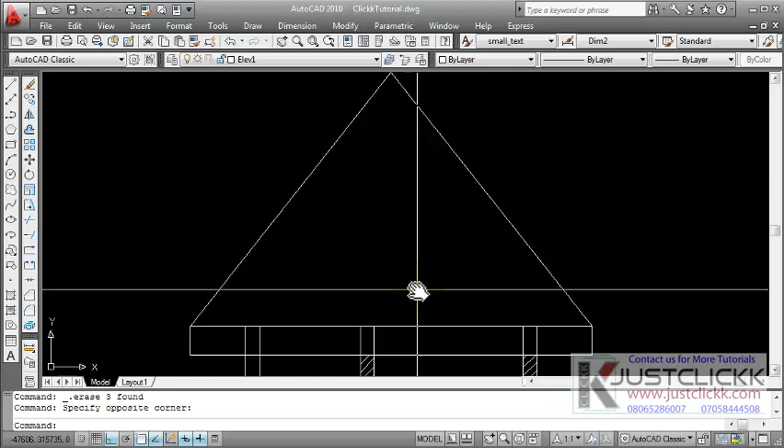So on the roof part of the cross section, we will start with the ceiling arrangement, and let's start by offsetting the thickness of the ceiling, something around 15 mm.

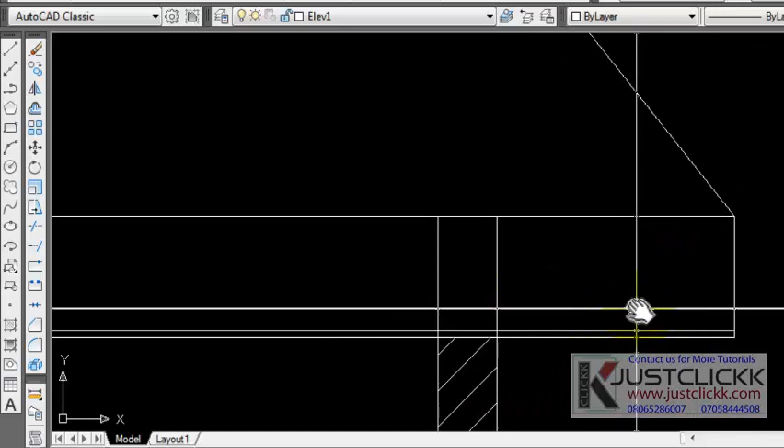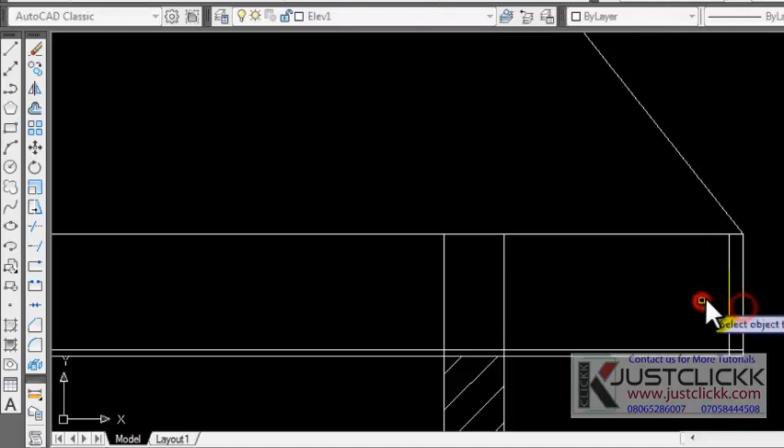Offset like 15 mm, like so, and we will now offset the thickness of the fascia board as well. Let's make that 50, or let's say 75. That's too big. I can't recall exactly the thickness of the fascia board, but let's give something that will look presentable. 30 is okay, or 30 or 35.

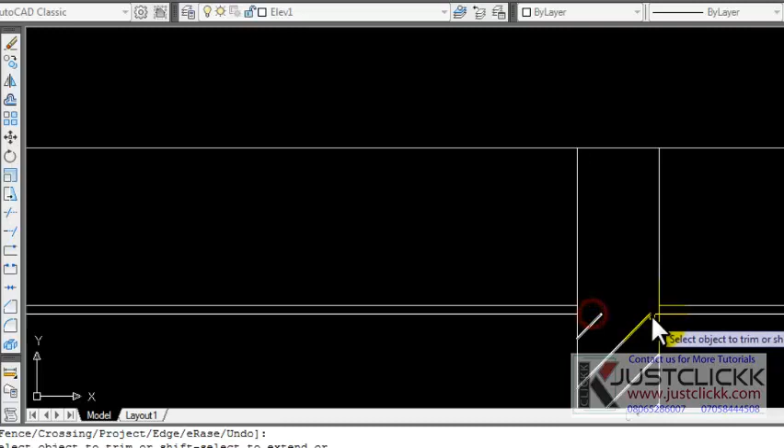At this level we can do some trim. We can trim this here like so, and we can also repeat a trim - sorry, I didn't activate the trim tool. We can repeat the trim right here because the ceiling is not supposed to run through the wall.

Okay, and mind you, I'm going to... that's how you start coming up with your ceiling.

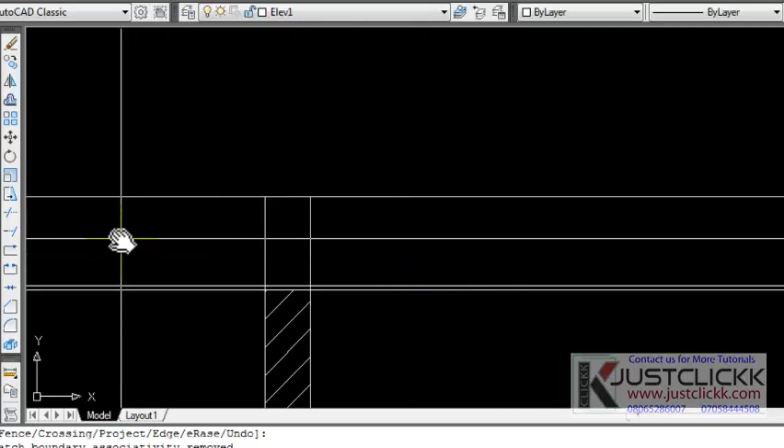Then let's create the noggins. We will check the noggin size, let me take a look at my sketch. The noggins are 50 by 50 mm.

All right, take your polyline and then create a 50 by 50 box. 50 by 50, come downward 50, and then close it up here. So you have your noggins.

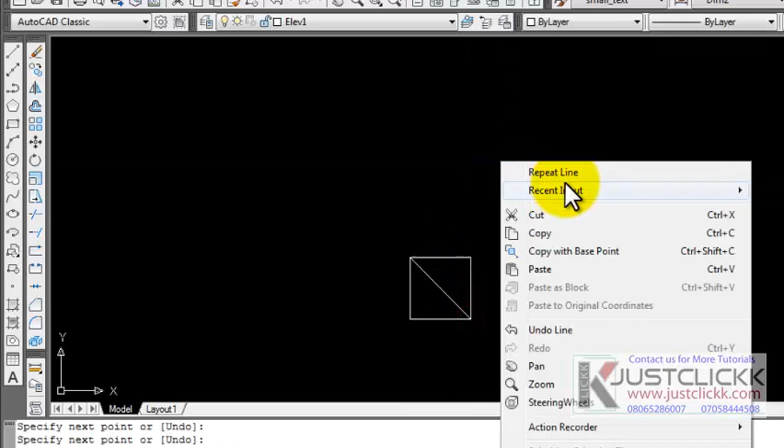So let's pick a line tool and create an impression like this. Repeat, and then we'll create from the center point here downward something that cuts across like so. So that's part of the noggins.

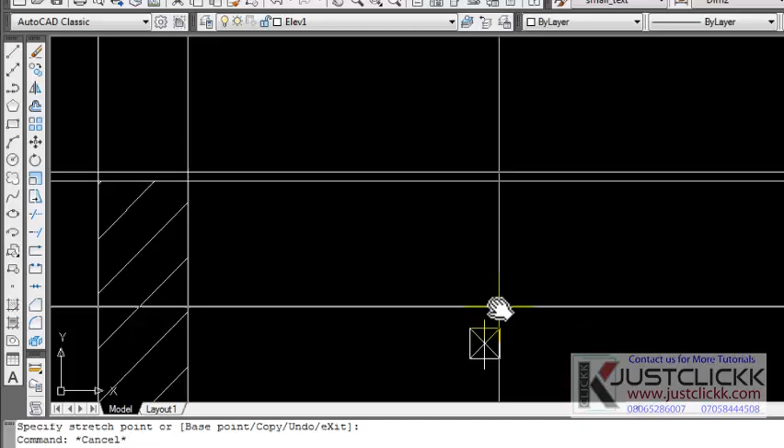We'll pick it and bring it right here. It's going to lap at the corner here.

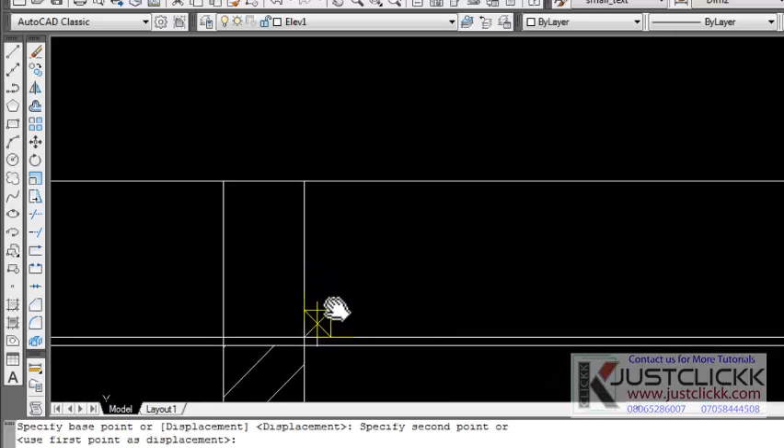It's going to lap at the corner there, and we will now use the extend tool to extend - no, okay, because it's a polyline, we can't extend. As you can see, we can't extend the polyline.

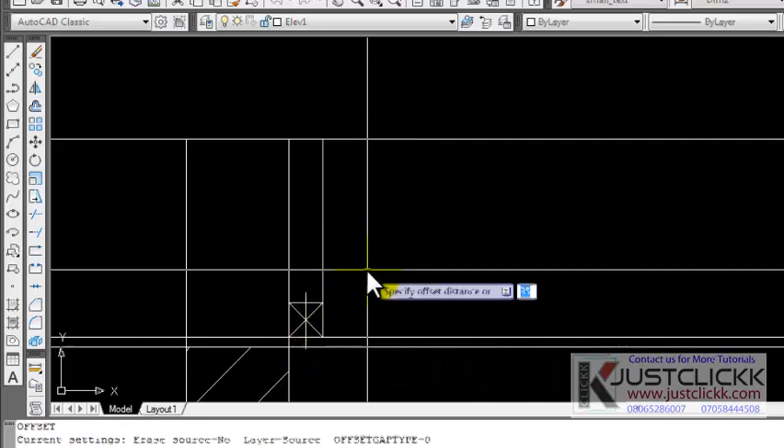So let's pick a line tool and create the vertical noggin, the noggin that is actually suspending the ceiling. Let's offset this, it's also 50 this way, and then use our extend tool to extend it down, and also use the line tool to connect it to this portion.

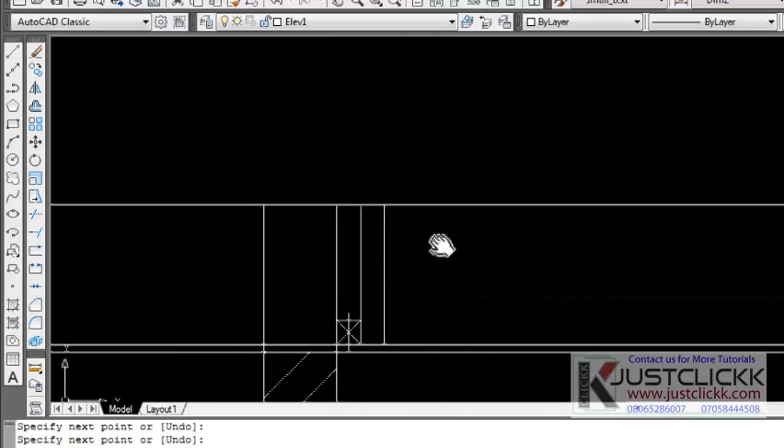So you see that a noggin runs from the tie beam straight down to the ceiling. So it's actually the noggin that is suspending the ceiling.

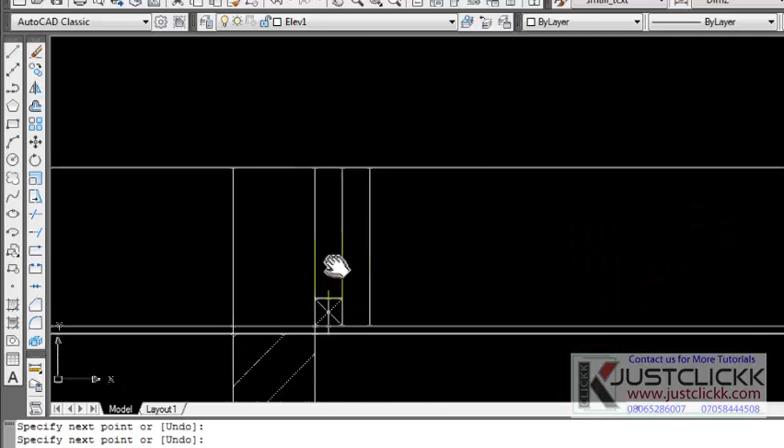Alright, so this is what we are going to duplicate in order to fill up these spaces for the ceiling. So now let's mirror this. I have to create a mirror here, specifying somewhere around here as my base point.

Delete, erase source object - no. I have the mirror here, then I will select this entire mirror and then move it at this edge to drop here.

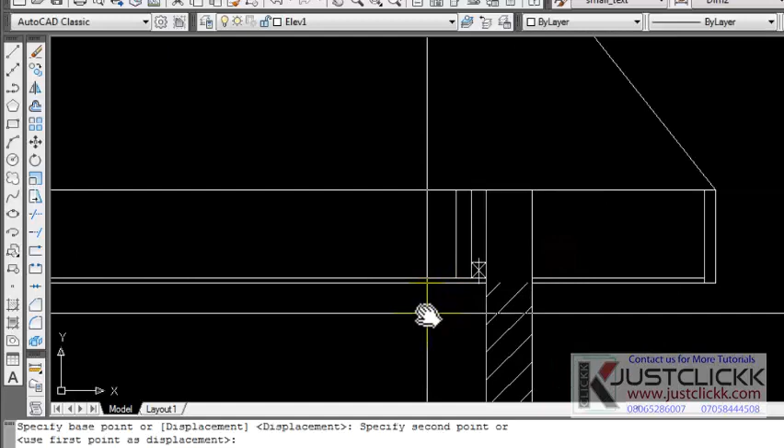So I also have to make another mirror to the - how do they call it - eaves, to the eaves here.

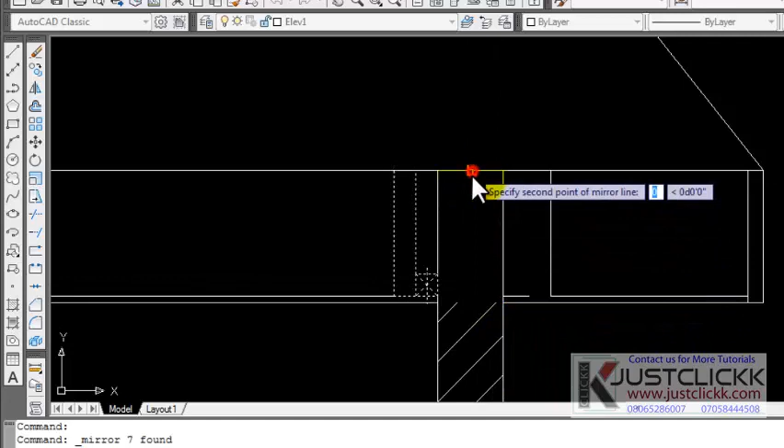Select this, I'll mirror it. I want my base point somewhere around here, don't erase the source object. So I'll reposition this properly by holding it at the corner here and allowing it to lap to the wall. Okay, I've just achieved that.

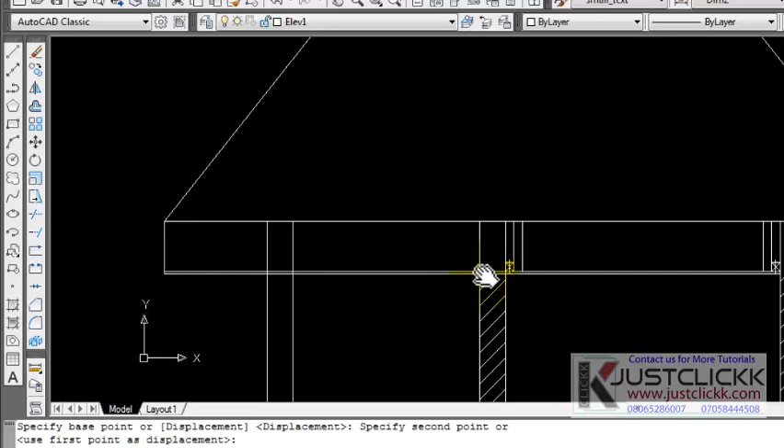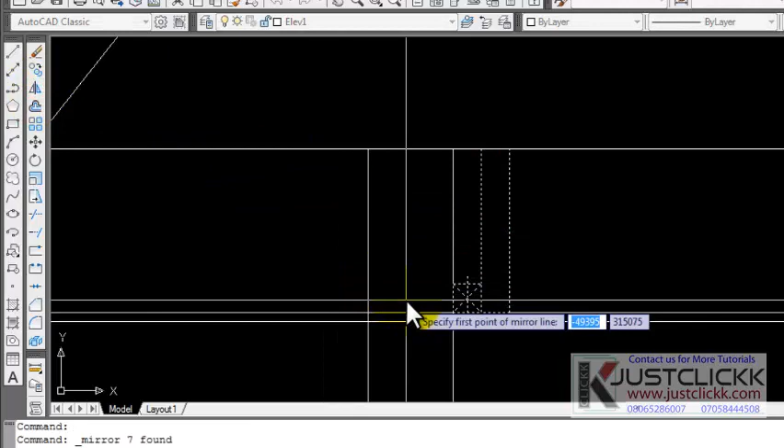I will also do the same here. Pick this, copy it this time around, move it from this edge straight to that place, and I'll repeat the mirror again. Mirror, reposition it to lap to the wall.

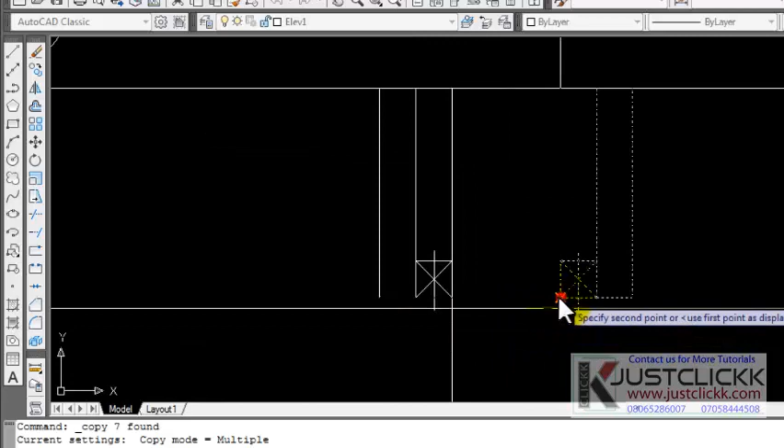I'll copy this, drop it somewhere around here, because I've not offsetted the thickness for the fascia board, which is 35.

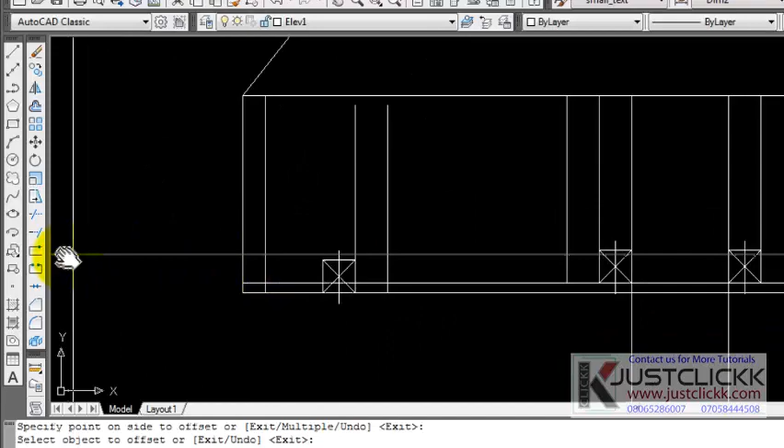Well, I think I would have just concentrated on one side, so when I am done I will then mirror to the other side. I think that's what I would simply do. So let me concentrate on one side, and when I'm done, I'll mirror to the other side.

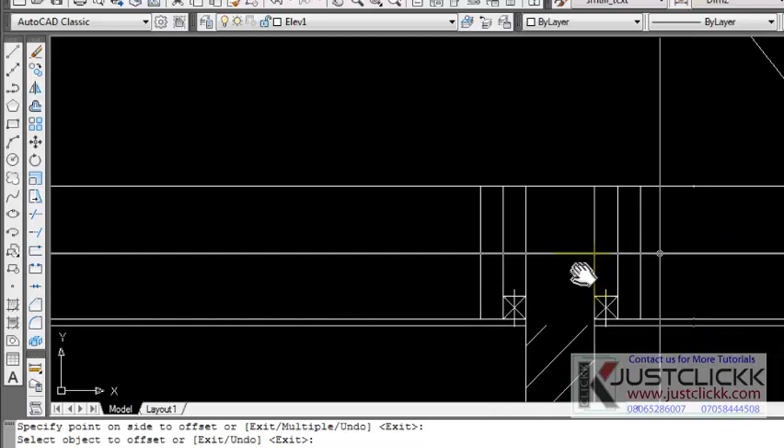Okay, so now that I have established the noggins, I will then multiply these noggins at 600. So how do I do that? I'll offset 600, then I will start offsetting these points.

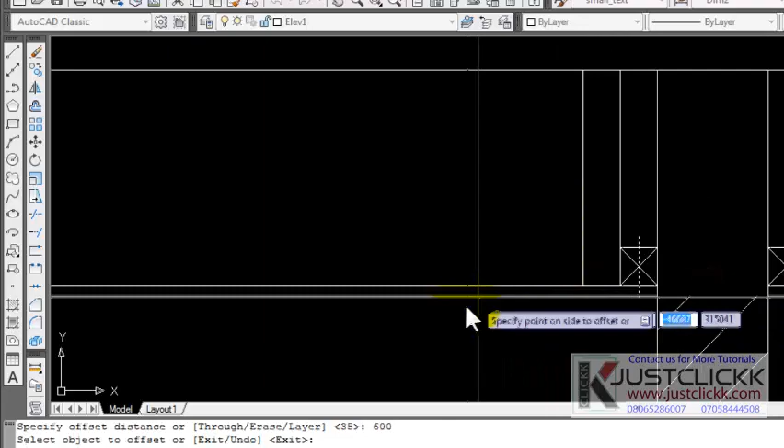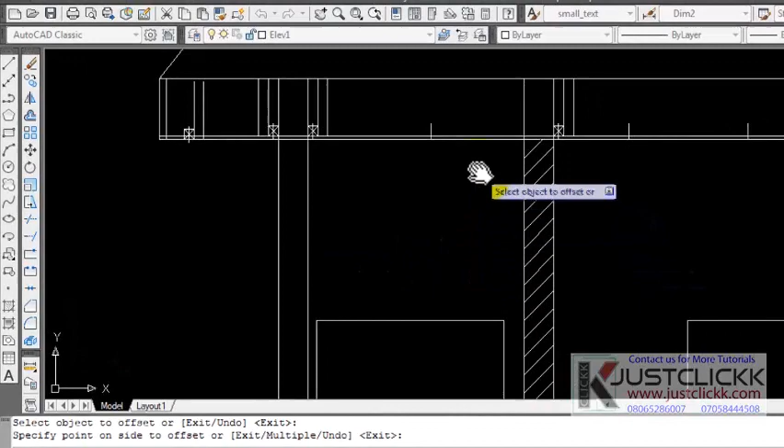For the noggins, let me start offsetting the center points here by 600, another 600, and offset 600 as well. That takes care of this, because if you remember from here, the corridor is 1200, so that's 600.

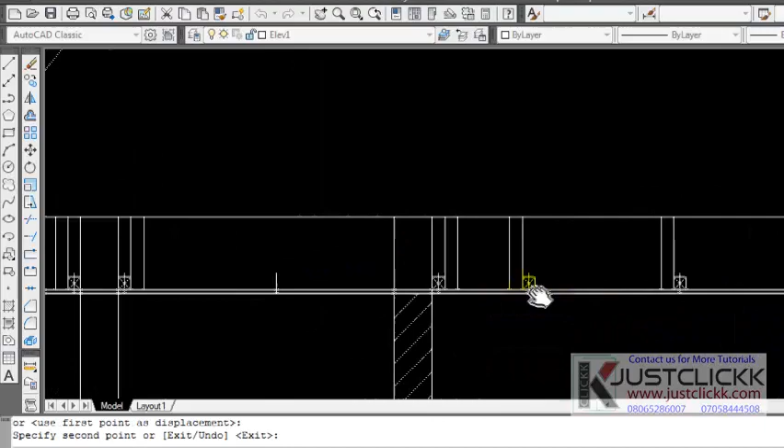Okay, so now I can make a copy, the noggins, like so. So you can see that the ceiling has been created. We've created our ceiling like so.

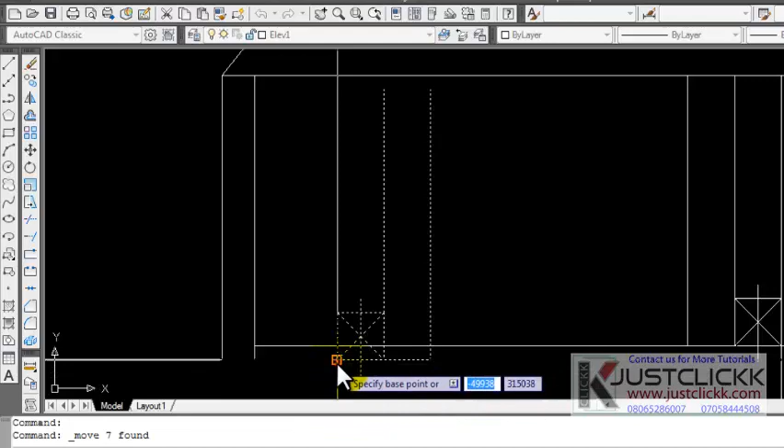And we can correct this here, since I've decided to make use of the manual process of dropping these things. Let's pick it up, it should be up. Okay, like so. No, I have to, yeah, it's correct. That's correct.

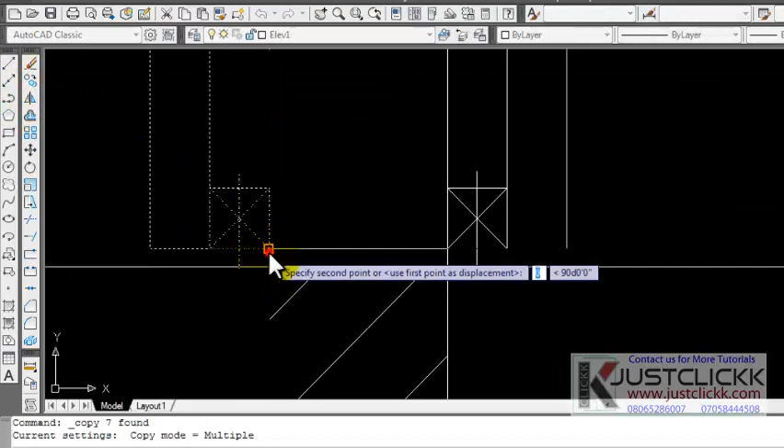Do the same here. Copy this, move it to this point. Okay, alright, so we have just created our ceiling. That's how you can create your ceiling on the cross section.

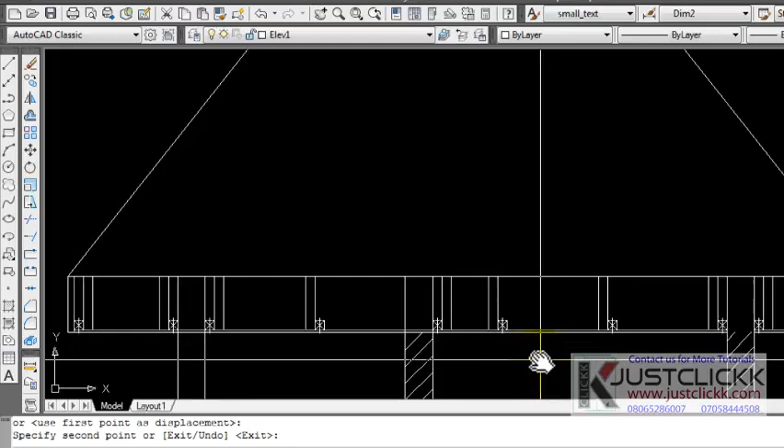So we left out some things here. Let's clean up, we have to trim up this ceiling that cut across the walls here. We'll trim this, and also we'll do same here. Okay, like so.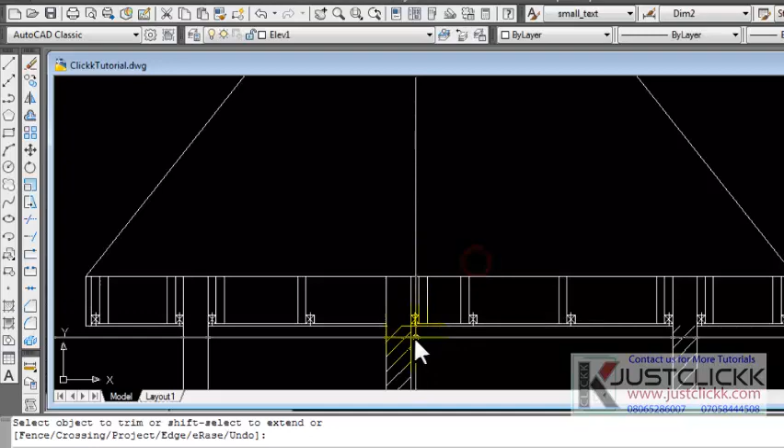So having done this, we'll have to rehatch our cut here up to the tie beam. So in the next tutorial we should be creating the tie beam and the trusses.

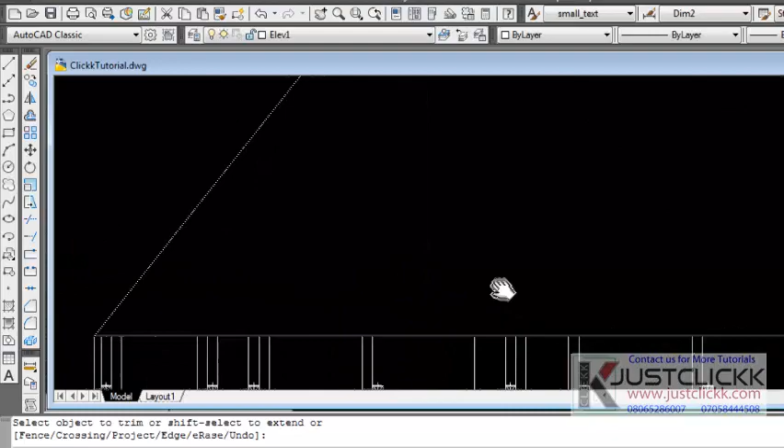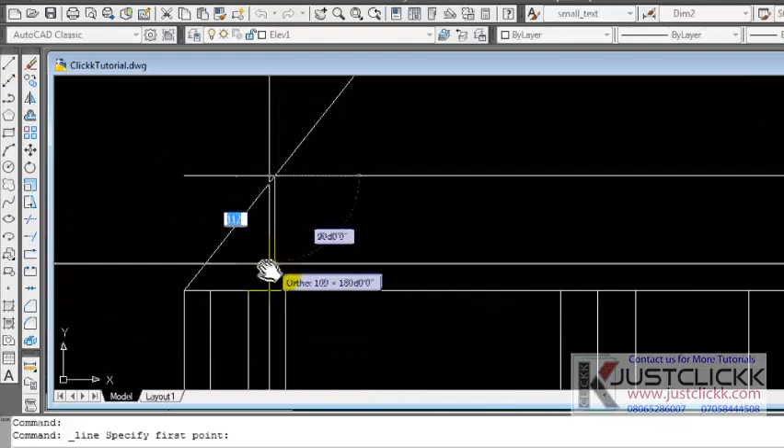Okay, so in this section of the tutorial we are going to create the tie beam and the trusses. Offset 150 from the tie beam line here, offset that 150, and then pick a line to bring it down, click at the intersection there and bring it down here. This is the height of your tie beam, and trim that off.

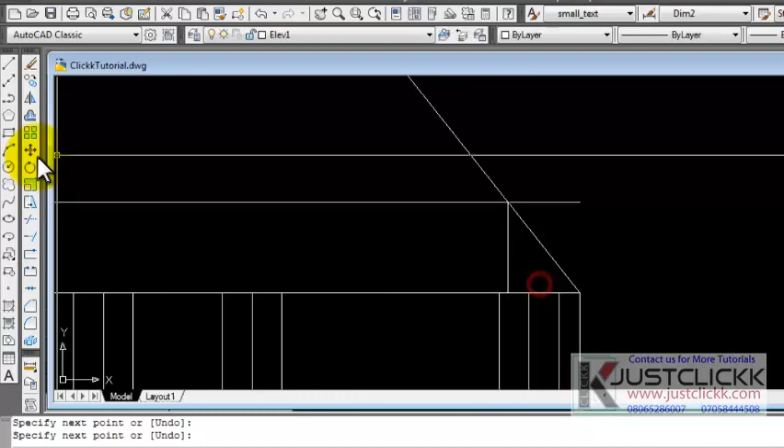You will do the same this way, intersection here, click, come down, and then trim this off. Okay, so the tie beam has been created.

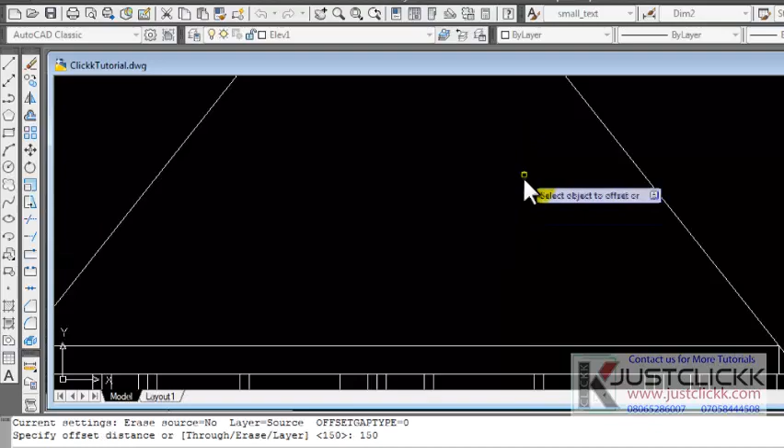So let's see how we offset the rafters now. Offset 150, your rafter is the same thickness as the tie beam. Offset 150 inside like this, offset 150 to the inside.

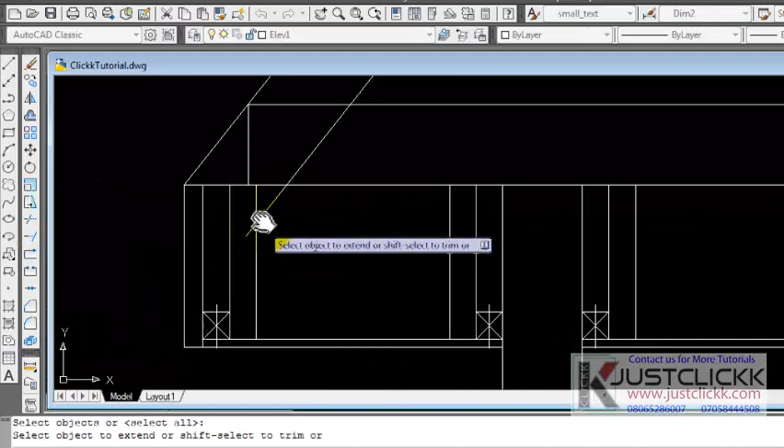And then extend it to hit the fascia board like so. Just click extend until it hits the fascia board. Do the same this way, extend to hit the fascia board.

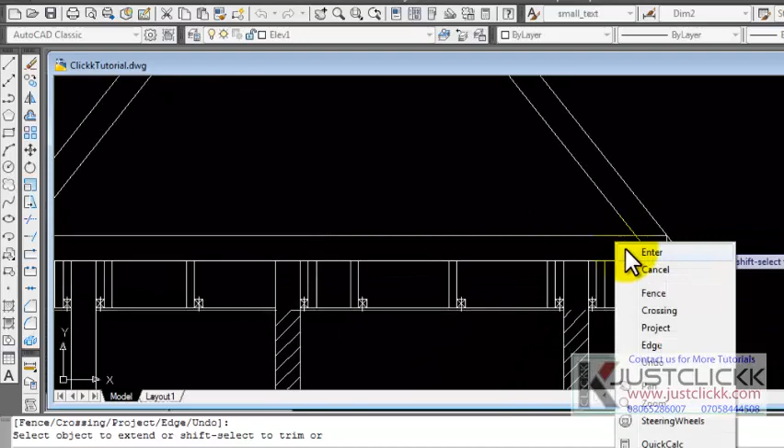Okay, exactly like that. And the next thing is to make some trims. You have to trim off certain areas like this. Trim this, trim all of this.

Sorry, I've mistakenly trimmed the fascia board. You trim this, you don't have to trim the fascia board. Trim this.

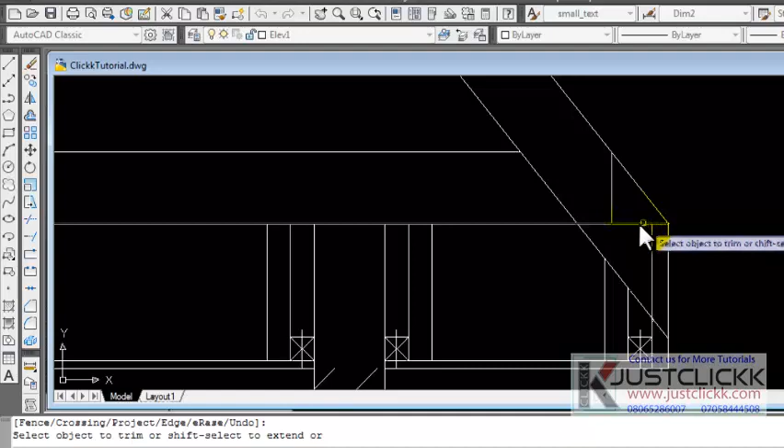You can extend this. Select some stubborn lines, delete them. Okay, like so.

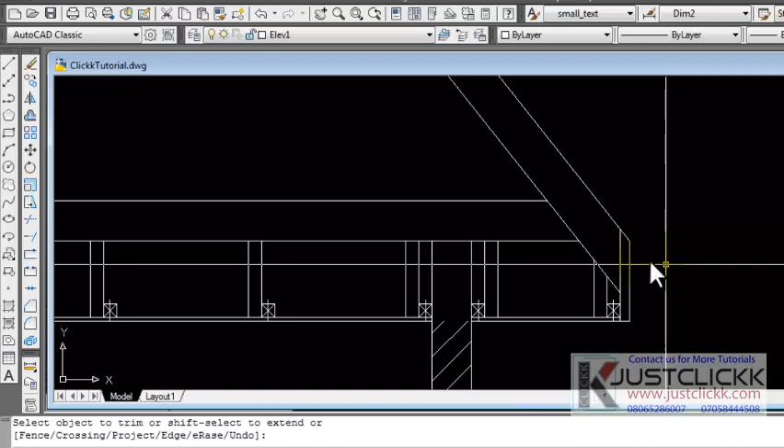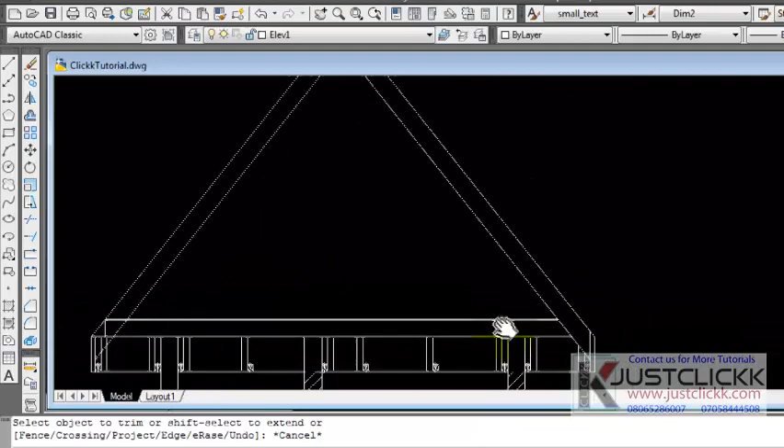Achieve that. Let's do the same this way. Or rather, like I told you, let's concentrate on one side. Once we are done, we can mirror it. You can only do both sides in a situation whereby you don't have equal ends. So now that we know pretty well that we have equal ends, let's concentrate on one side and get it done.

Okay, so we have achieved that down there. So let's trim off some areas up here.

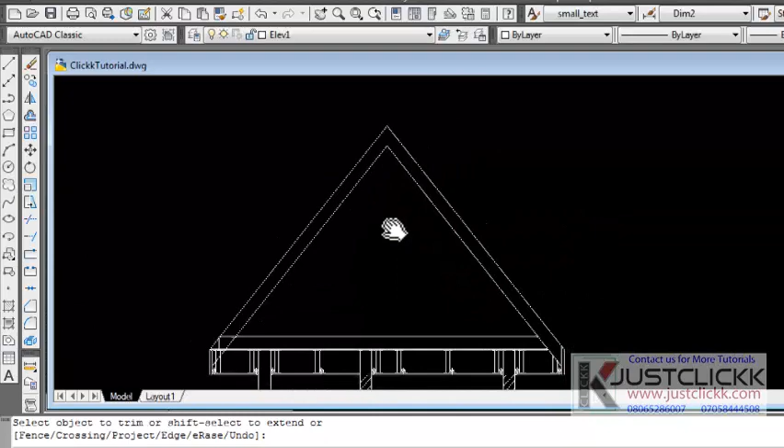Okay, so now let's bring down a center line here, which will be the king post. Offset that to serve as the king post. So let's click at the center point here. Let's bring it straight down like so to hit on the tie beam.

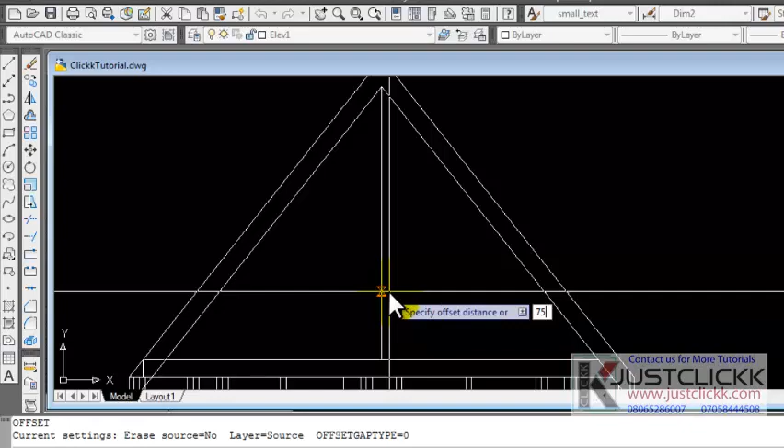So offset 75 this way, 75 that way, so that will end up with 150. It's a king post, 75 this way, 75 the other way. And I don't think we need the center line at this point.

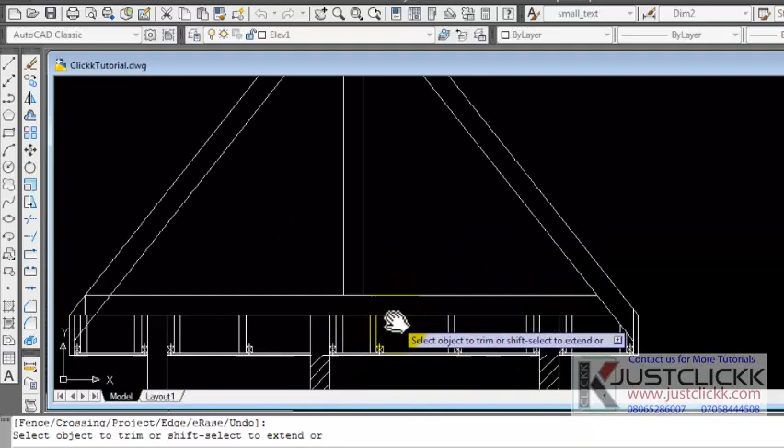Let's just go ahead and trim that portion off, and extend this to tie to the building straight down. Okay, it's not necessary.

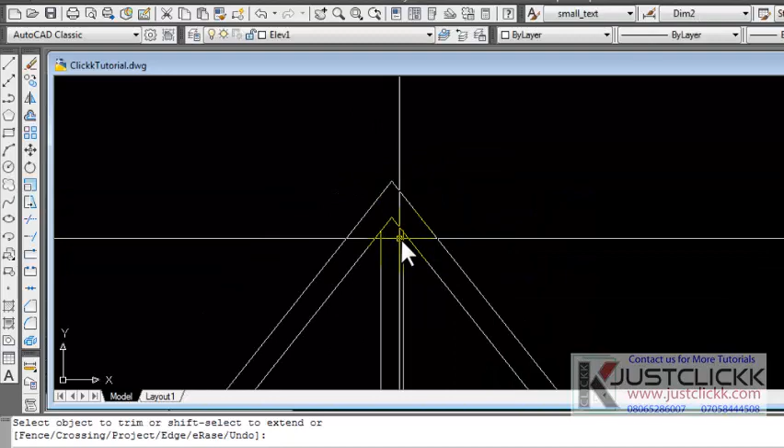I'll just undo now because I want to undo what I've just done here. I undo and it affected the top where I've already trimmed. A problem, we can go ahead and trim that. Okay, so now we have established the tie beam and the rafters.